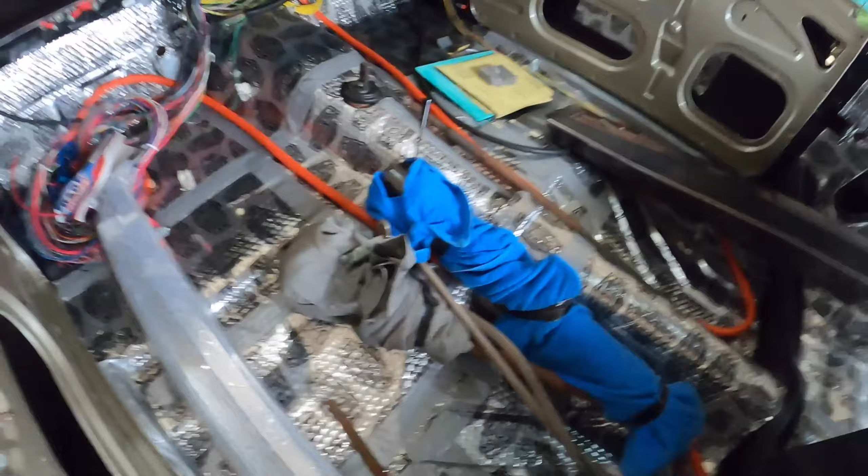So to make it a bit easier, what I want to do is fit the steering. So I've got it all wrapped up there. There's the steering column and the stuff. But before I do that, there's a bit of suspension work that I've got to do.

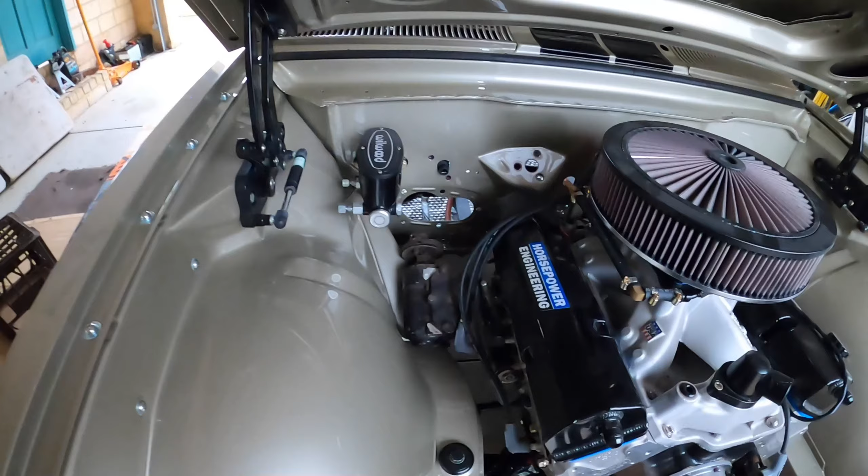That's not my steering box, so I've got to pull that steering box out and put my steering box in it. And then the sway bar and things like that, they're not done tightly, and the new bushes haven't been put into a lot of the suspension pieces.

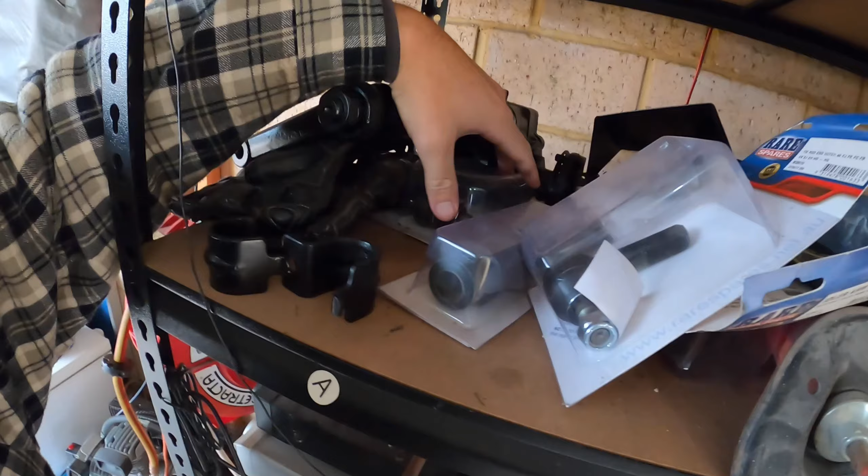So up here, probably should have got this ready beforehand, but I've got the new tie rods and ball joints and things like that I need to put on. There's my steering box, so I've got to put the steering box in.

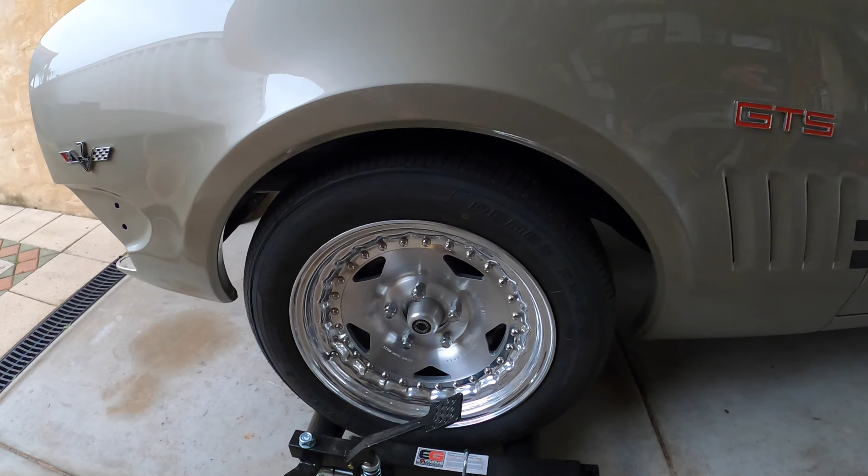Another issue that I've got, that one of the dudes on Facebook told me, is when I put the upper ball joints in, you sandwich them, or bolt them onto the upper control arms, and when I've put them on the upper control arm, I think it should be bolted from the top down, and I've bolted it from inside up. So I've done it back to front basically. So that's my first job, is to pull these wheels off, sort out that upper ball joint on both sides, so that's sitting correctly. I did say it was an amateur build, so learning as I go.

And get that fixed, get the steering done. I've got some painting to do in relation to the tie rods and steering arms, some of the steering arms, so I might have to blast them and paint them up before I can fit them and get the steering done.

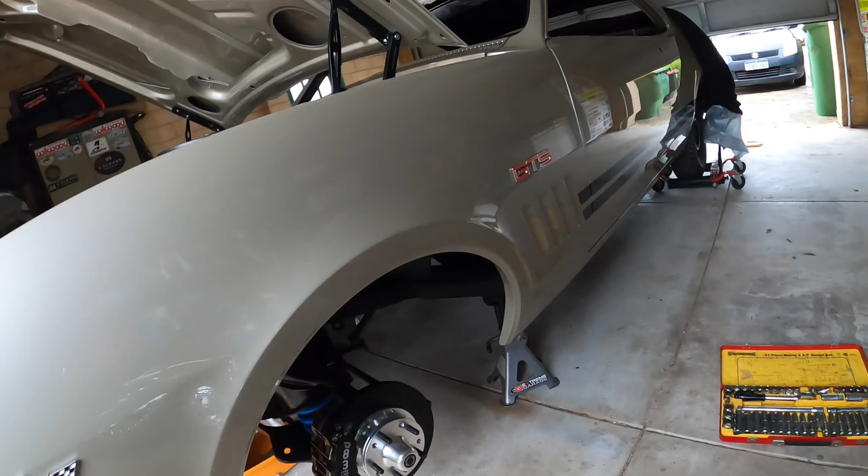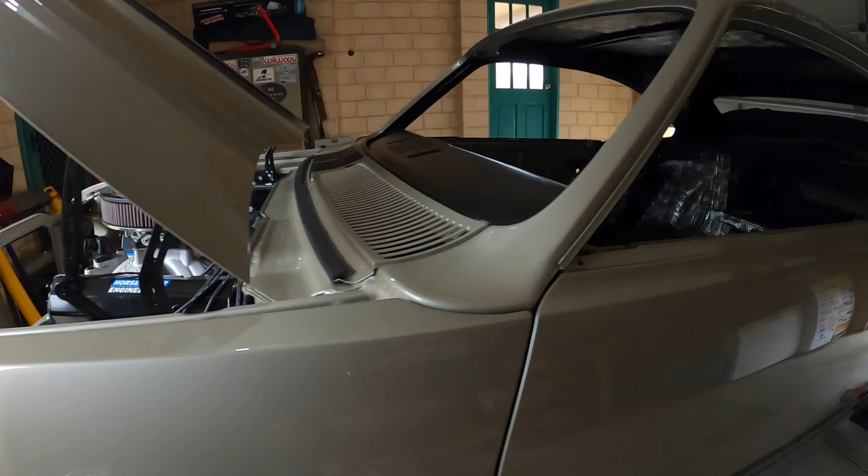So this is what I was talking about. What I've done here, I've got to take this ball joint out again, hopefully you can see it. I'll just get my phone so you've got a torch, bear with me.

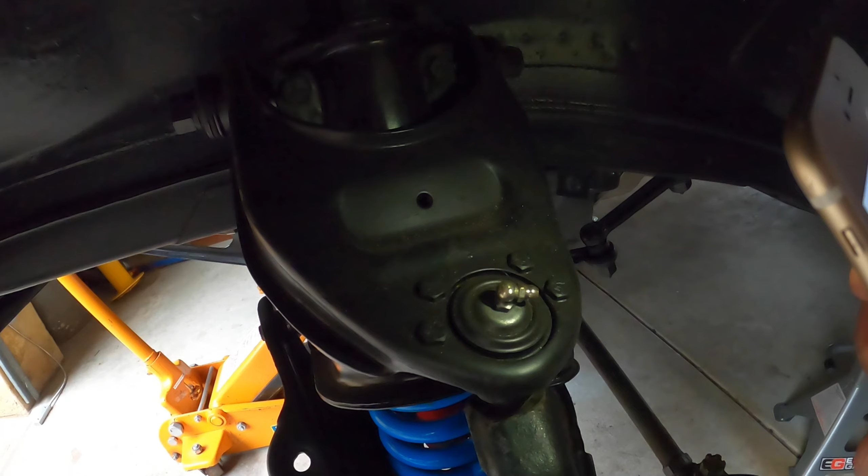So anyway, see these bolts here, just 1, 2, 3, 4. I'm going to undo them and then take the ball joint out underneath here and then sit it on top, because I've done that wrong. Here goes the torch. So that's the first job, sort that out, that way.

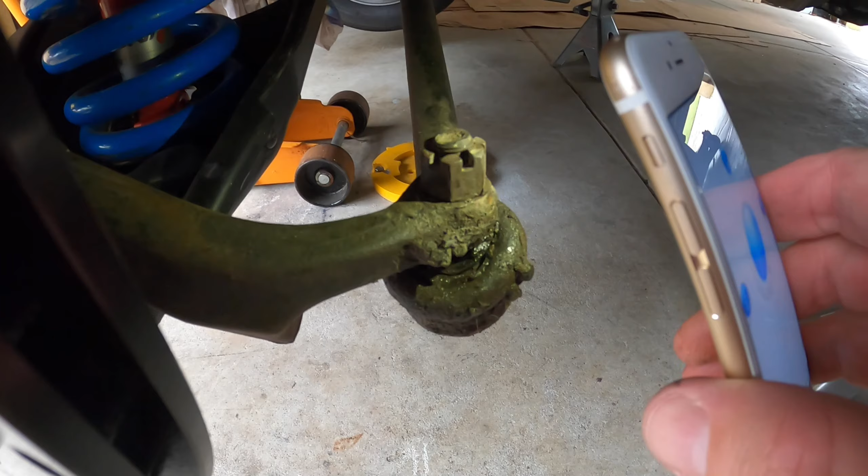And then see these steering arms and everything, again they're not painted, they're the old ball joints. That part's painted, so I've got to pull them off, blast them or sand them, whatever I'm going to do, and then put them back on.

Once I've done that, then I can take the steering box and nip everything up, get it right, and I want to put the steering wheel in if I can. That'd be cool, I feel like I'm doing something then once the steering's all working. So that's what we're going to do. Thanks, dudes.

So pretty easy, just drop that, whatever that thing is, that steering arm. That'll just come off. I might have to give that another little spray of touch up, and along here too, that looks a bit shit, doesn't it? I'll fix that up. So it's just undo those 4 bolts, drop that down and then put it through the top. So I'll go ahead and do that, and then I'll do the other side.

I might pull these off as well while I'm at it because they obviously need painting down here. So I'll pull them off, pull that off, paint that, put the new ball joints in, put it all back together, kick a couple of goals. That's not going to take too long. Happy days.

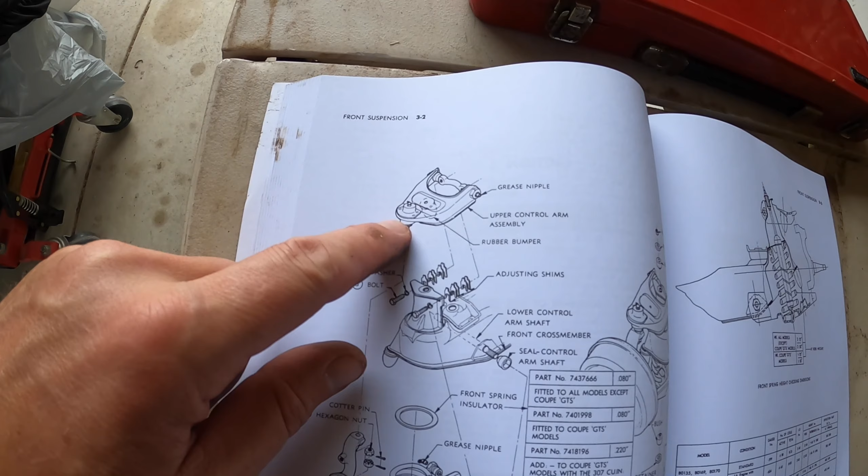Yeah, so I got the book out here and it does clearly show that top ball joint coming in from the top. So thanks for that tip, whoever told me that. That would have been another mistake I've made.

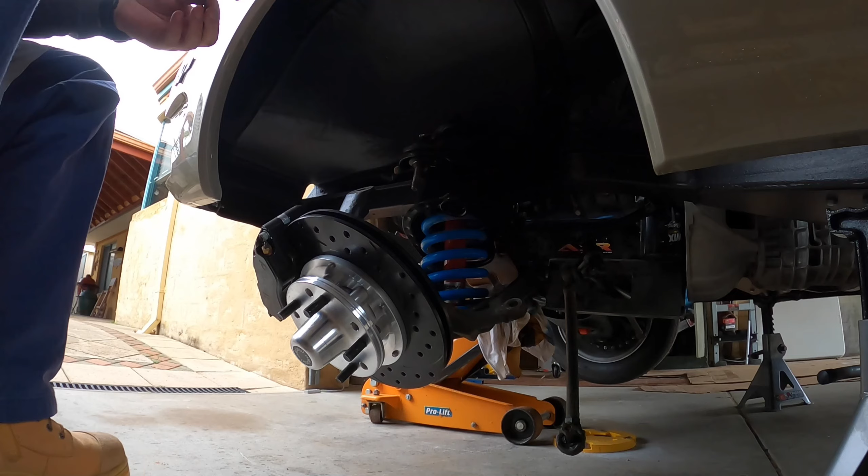That was in there like that, and now that's like that. These are the sort of comments I need and the help I need. If you see me doing something wrong, for Christ's sake, make a comment, speak up. And that way I can make sure it's all done right.

Righto guys, so finished rectifying the ball joints on both sides. Thanks to that guy, whoever it was that made mention of it on Facebook when he saw it. I'm going to put the post up, so I appreciate that.

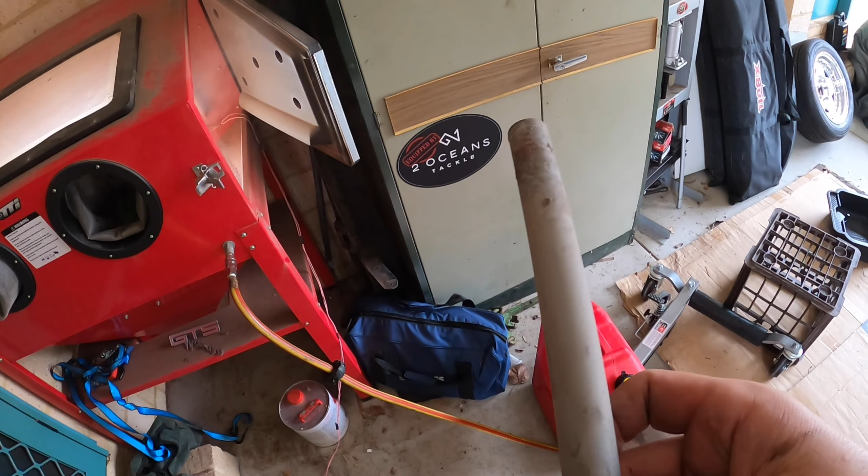Moved on now to the steering arms. So I've got a sandblaster, I'm just giving them a bit of a touch up with the sandblaster so that I can paint them. Once they're painted, they can go back on with the new ball joints and whatever.

Part of the problem I've got with this sandblaster is I've got this compressor from Total Tools I think it was. It's not a bad compressor, but I haven't really got it set up properly, I don't know a lot about them. It's a 3-cylinder thing, I think it's got plenty of air pressure to run the sandblaster, or just enough, put it that way. But you've got to drain it regularly, get water out of it and all that sort of stuff. Otherwise the water tends to come through the hose and then into the block and the sandblast nozzle, so that's just something I have to put up with.

I just do it bit by bit, slowly by slowly. Otherwise it generates too much heat, and when it generates too much heat, it generates too much water as well. So that's what I'm up to at the moment, and I'll keep boxing on with this sandblasting tool. They're pretty nifty actually, very handy to have.

Alright, I'll come back to you when I've painted them, I suppose. Cheers. Righto, so I've sandblasted the left side.

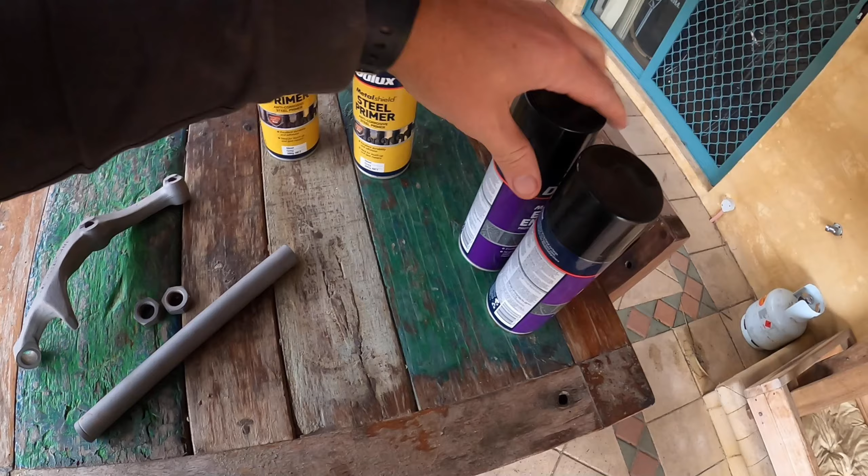Steering arms, I'll give these a wipe down with thinners. And then for these I'm just going to use a pressure pack, doesn't need to be anything fancy. I do have a spray gun, but there's no need to do that. I'm only doing one side at a time because that gun does get a bit hot, the compressor gets a bit hot, which creates moisture in the sandblasting medium. So I'll paint these up and hang them, and I'll show you when I've done that.

Righto, got a primer coat on. Come back, wait for that to dry, and I'll whack a couple of coats of satin black on it, and in the meantime I'll go and sandblast the right hand side.

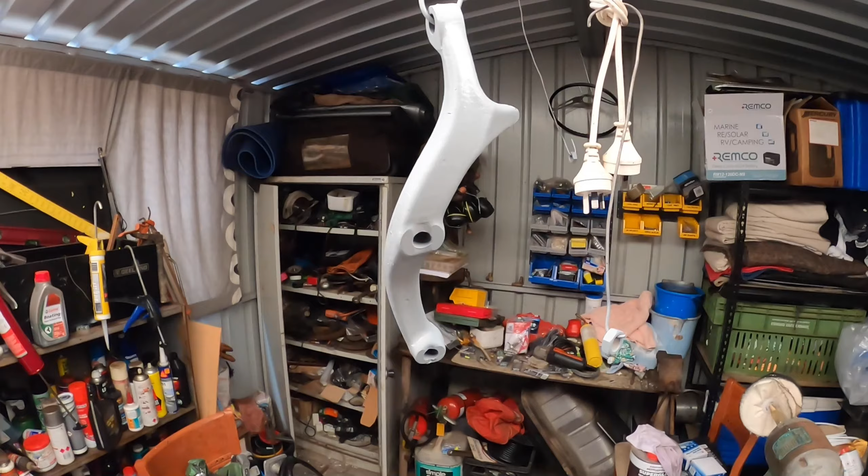Final top coat done, some of those little bits and pieces. This is the other side now, this would be the driver's side. And I'll paint them up.

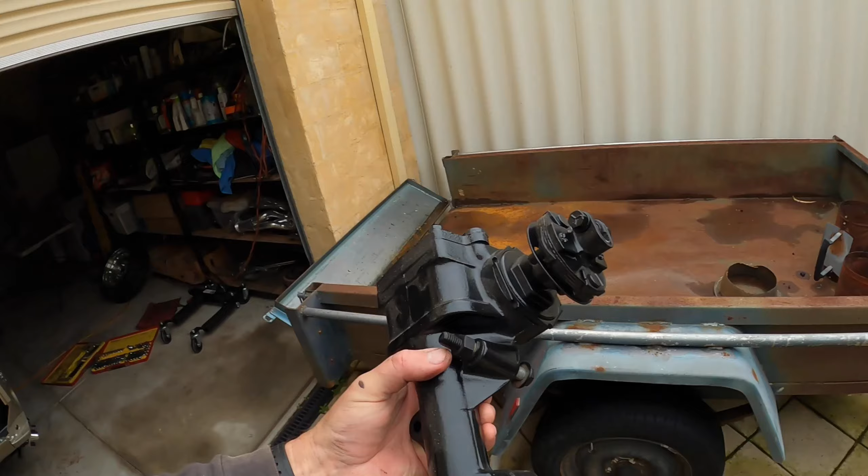What I'm going to do now is pull the steering box out, I think, and put my painted one in. Tidy up the bolts, sorry, that hold that in as well. So this is my steering box, painted.

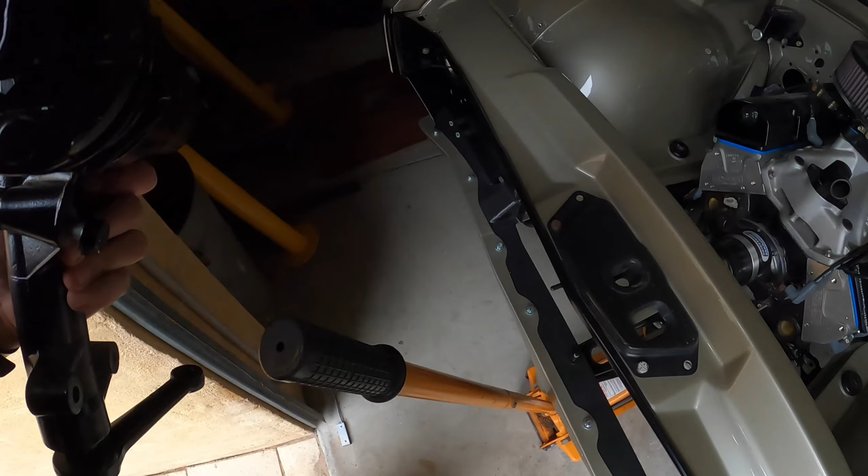It didn't have a lot of slack in it, so I'm not going to put a kink through it, just in the process of taking the old one out. Let's put this down for a second. I'll set the camera up because I've just undone the 3 bolts to get this out.

Right, well, that's the steering box in. Kicking a few goals now.

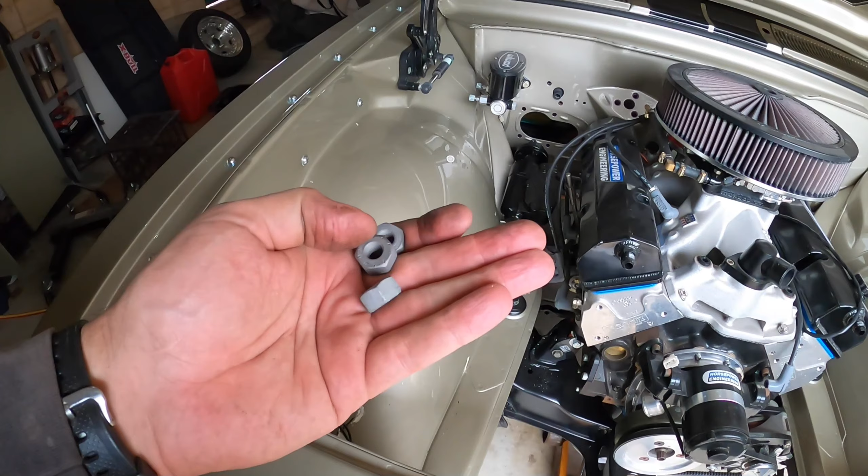I've got the nuts here, I'm just going to paint them up, and I'm missing the lock nut, the lock washers in the book. Tell you what, if you're doing up a car, one of these cars, and you don't have one of these, get them. You've got everything you should need.

It comes in 2 volumes. You need to get it realistically. You can't do it properly without.

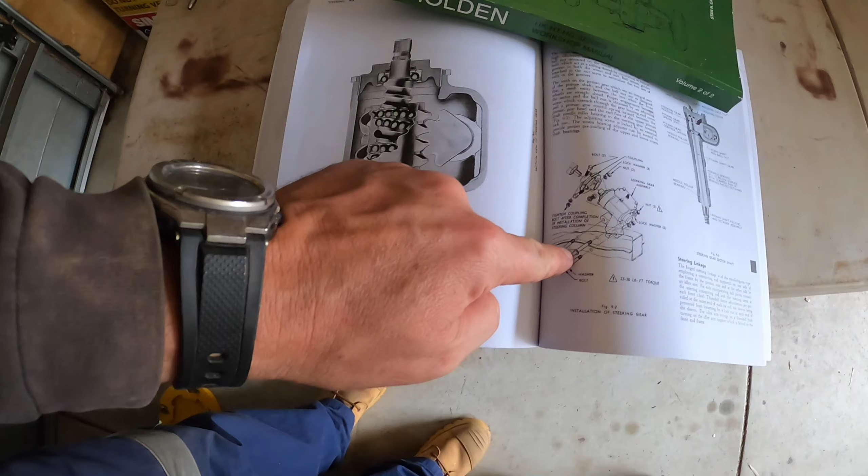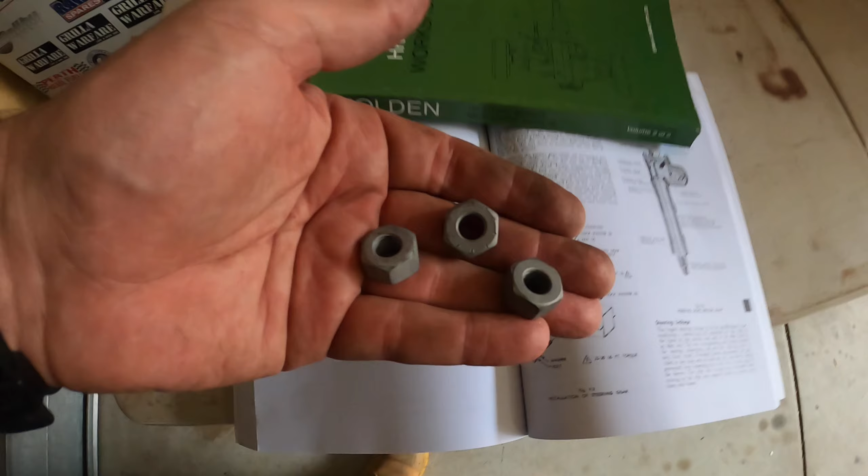So it shows a washer and a lock washer as well as the nut, and you can tell there was a lock washer on them, and my lock washers are missing. So I'll pick the kids up from school, grab them and be able to bolt it, I'd do them up. So I'm pretty well today, a bit more done than I thought I would. Happy days.

Remember the boot garnish, the stainless trim that I polished and repaired and filed and all that? Well, I thought, I've got the tin of paint out now, I might as well give that a coat of paint.

So I've taped it up, that's the undercoat, obviously just the centre stripe needs to be black. So just give that some undercoat, and I'll give that a lick of paint, and then I can put that on the boot, and that's another job done.

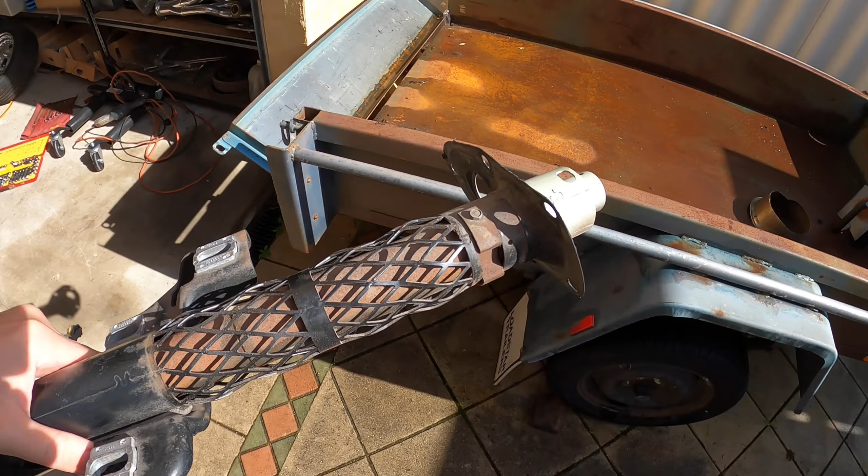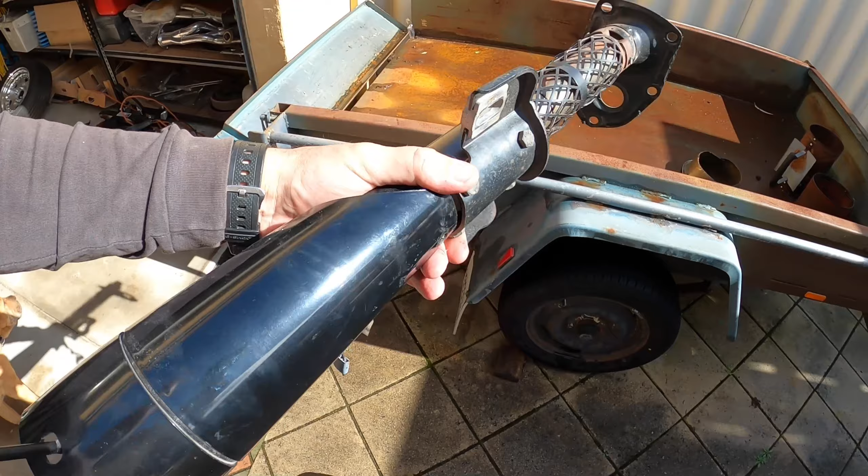So getting there, I'll get around. I'm going to try and put the steering column in today. So just sort of tidy this up, and it's probably not going to go in today because I've got to repaint this, put some sealant on there. We'll get that old sealant off, probably blast that a bit and paint it up. So probably not going to get it in today, but at least we'll get it painted.

Don't know really what I can do today because the other parts are still drying. It's been real wet over here, and cold, so stuff isn't dried properly yet.

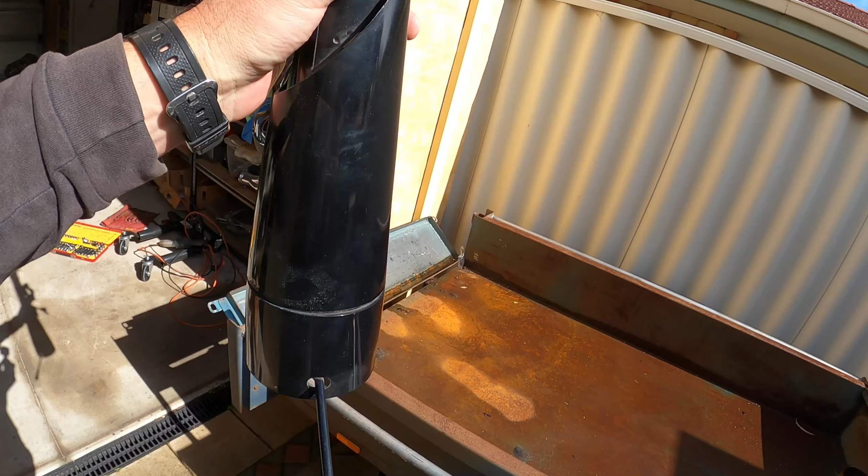So look, I'll just prepare this and get it ready, this steering thing, and I'll find the nuts and bolts and whatever in my containers of nuts and bolts and get it all ready, and then I can bolt it in. I've had a look in the manual how it all goes back together, it doesn't look too difficult. So yeah, get that done.

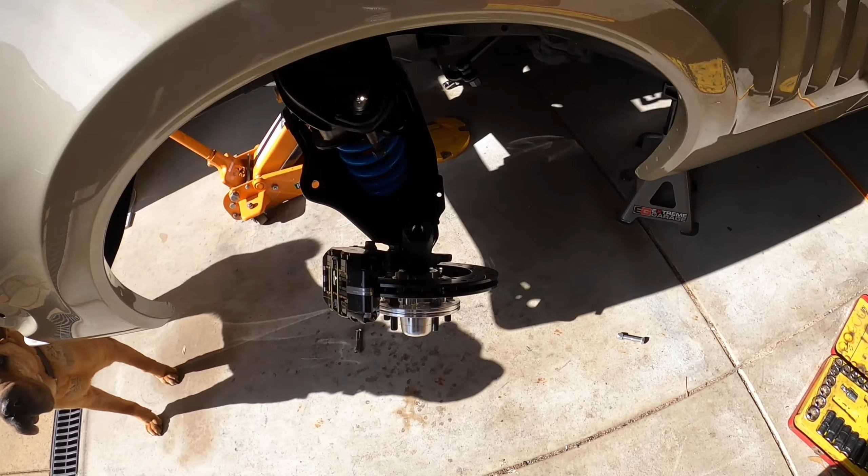While I'm at it, let's put this down. I've got to replace these because we've misplaced my nuts and bolts that hold the steering arm on, and these aren't high tensile. They were never supposed to be there, so I've got to replace them with some high tensile ones. Been told UNC, I think they said. I've got it written down anyway.

So dog wants to come in. I probably won't bolt it back together until I get a hold of those proper tensile bolts and get it done properly. So just a couple of things I can box on with in the meantime. Cheers.

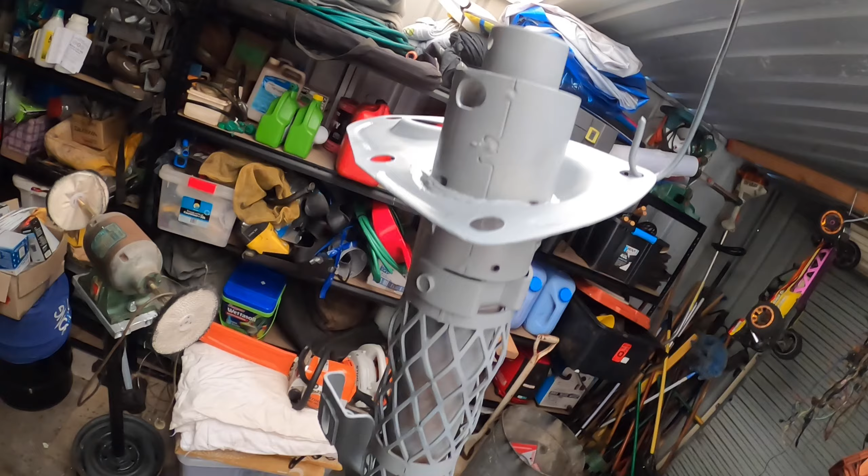So back in the paint booth, just giving this steering column a quick primer and paint before I reinstall it.

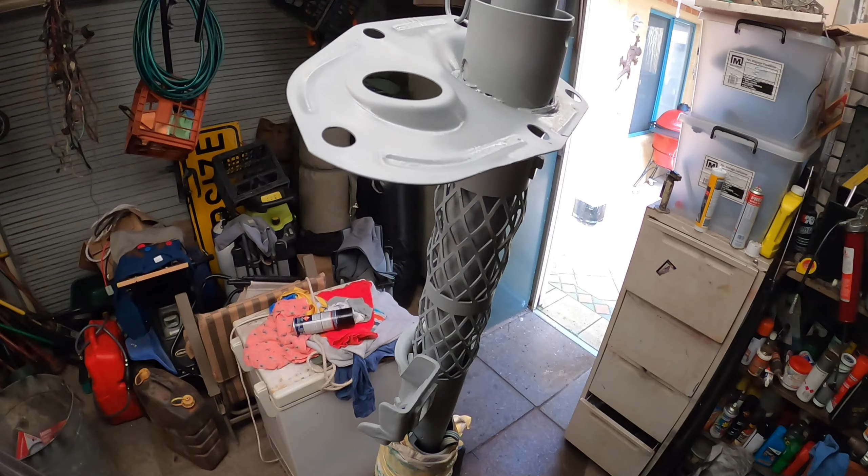You know, it doesn't have to be perfect, but it doesn't hurt to tidy it up a bit. It's 50 years old, so might as well paint it all before you put it all back together.

I gave it a quick blast. Actually, there's a bit of surface rust around here, and just light, you know, around here. So I decided to just give it a quick blast and a rough spray just to tidy it out. There's a plastic cover that goes over that anyway, but it doesn't hurt to do it properly.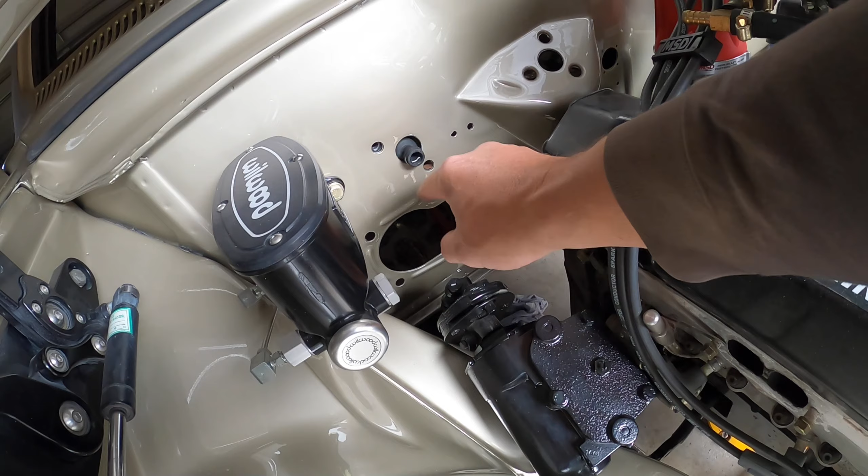So what I'm going to do now is go and find the nuts and bolts for everything, for the steering column. I'll turn that music down, otherwise I'll get a copyright infringement. So yeah, I've just got to find the nuts and bolts that go around there to secure these in. It's part of the clutch master for the hydraulic clutch.

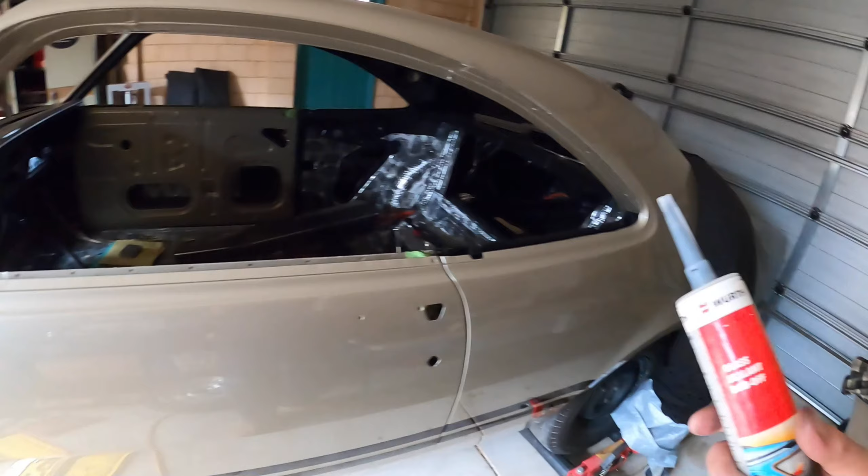I've got some sealant here that my mate gave me. Tomo painted the car, so I'll use this sealant to secure the steering column up against the firewall there. And now we're going to go through these boxes and find all the bolts.

So they've all been replated. I'll get into that now, so once it's all dry and painted, I can get back into it and put it together.

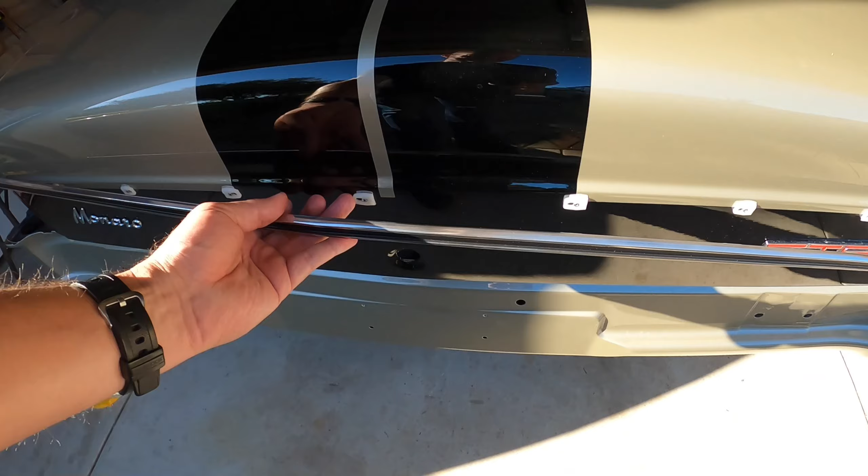Happy days. G'day everyone. I've just finished polishing that stainless steel trim for the boot garnish. That's the one I had panel beaten. Really happy with the way that's turned out, see that's really good. So now I'm going to work out if I can put that on there. Bear with me and we'll give it a crack.

I'll have to find the clips that screw into that. Righto, so I've just found the clips. They just slide in there on either end, and that goes in there like so.

Alright, I just want to do this with two hands so I don't scratch anything, so bear with me. Alright, I think this is going to be a bit quicker than just clipping it straight on. Sorry, take a bit longer. You can see that bolt there is not straight up and down, so those holes need to be elongated a little bit, maybe. That's the same.

So what I'm going to do is put that on the back burner for now. Yeah, I was just excited to see it once I polished it and pulled the paint off it. So I don't want to go rushing it and balls it up. So I'll take that off for now and put that on the list for another day. Cheers.

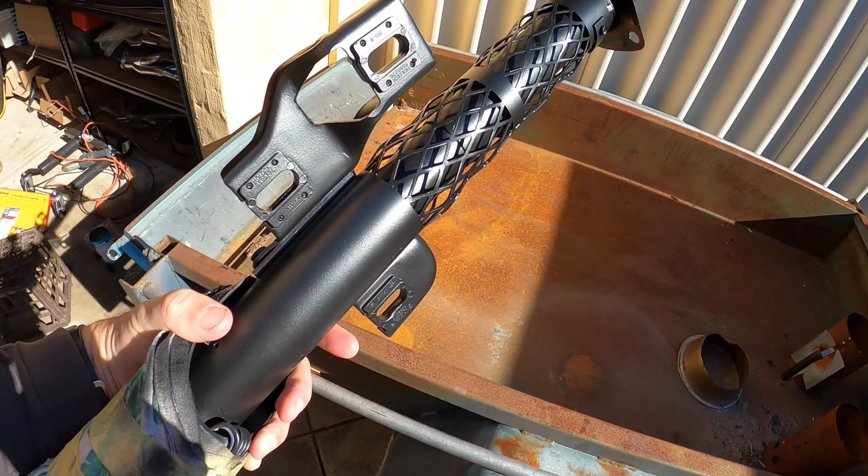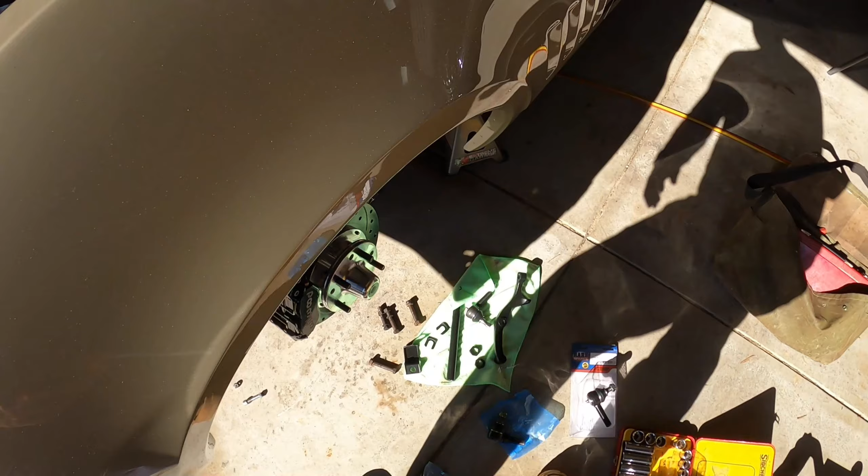Righto guys, back at it again, day 3. We've got a few things done today. So this is the steering column that I blasted and painted. It's kind of like Mickey Mouse. Just got to take this stuff off. Before I do that though, I'm going to finish this job, so putting the ball joints and steering arm on and all that. I put a post on Facebook because I lost these original nuts and bolts, so I put a post asking what to replace them with.

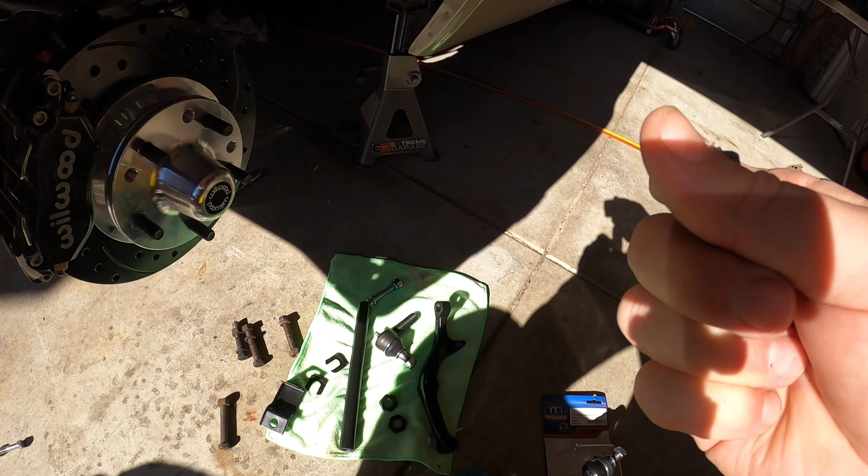I was always taught there's no stupid question, so I thought I'll ask the question just in relation to whether it be high tensile or not. I thought it would be, but I also am aware that high tensile is a bit brittle, so I just didn't know how that went with putting more brittle parts on steering arms. So anyway, that's the reason I asked the question.

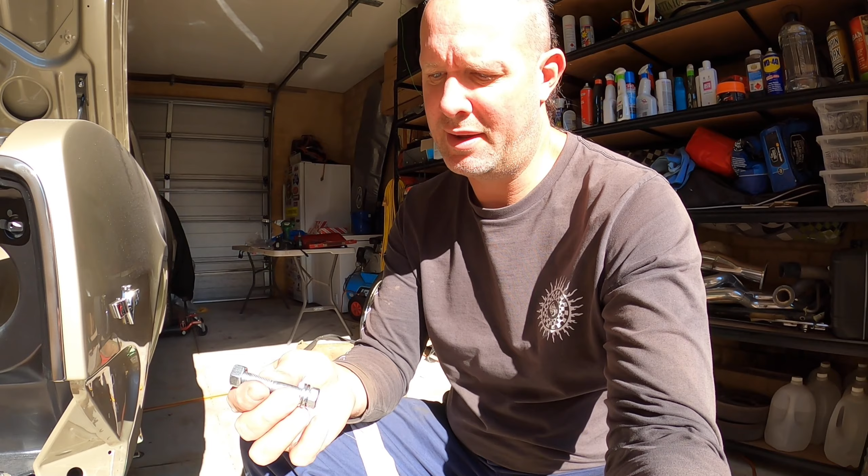But I think the overall general consensus was use the factory ones if you can. One of the posts I got on Facebook, which made a bit of sense to me - whoever that was, if you're listening, thank you for speaking to me about it - was that these are actually grade 5, and what he said was there's a difference in their brittleness, how brittle the part is, and he suggested just go with the original ones. So what I'm going to do is just clean these up with the wire brush, and I'll use the original ones now that I've found them.

I'm not going to go with the new ones. As was pointed out to me, Holden spent a lot of time researching and developing their products, and they would have chosen these particular bolts for a particular reason. So I am going to use the original ones. Thank you for the advice, appreciate it. Like I say, it's an amateur build, I don't know everything, but the way I look at it, I know enough to ask the question. So if you want to knock someone for asking a question, that's up to you, whatever, but all good.

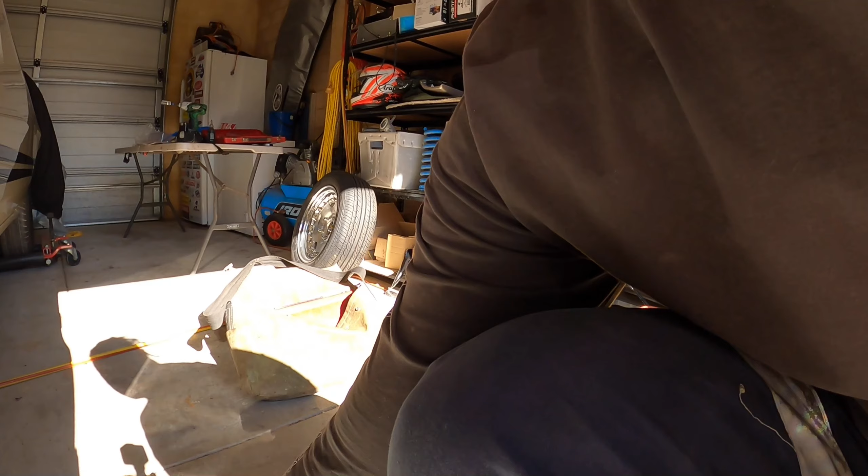So anyway, get back to what I was on about. Steering arm, it's all been blasted and painted.

So put these new tie rod ends in. I called them ball joints before, didn't I? Sorry. That holds the brake hose keeper. The arm itself has all been painted up, so it's all going to look pretty good.

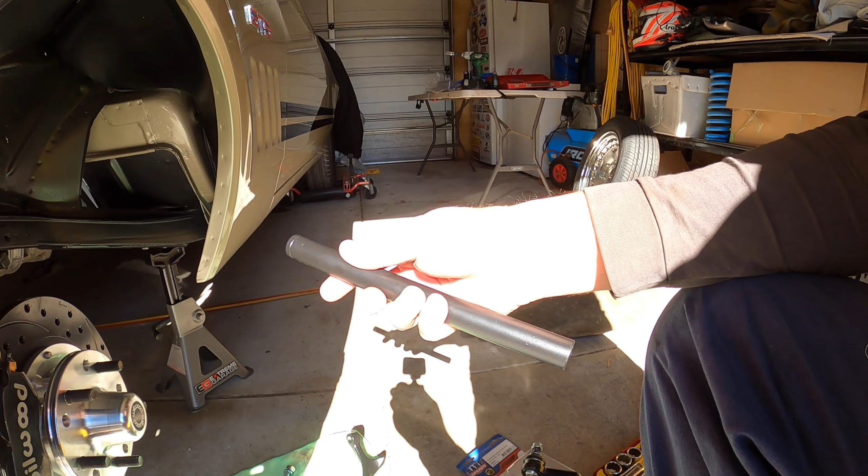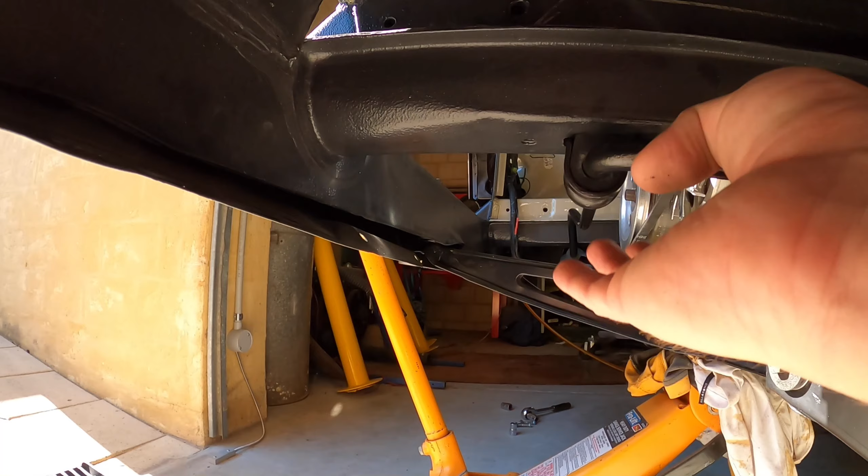Once I get it on the deck, once I finish putting all that in, I've got these, I've got to obviously do that up, but got bolts for them. So the sway bar, I think that's called. Anyway, once it's on the deck, I'll feel safer than it is now on the jacks to get in there.

And put the steering column in. That was the goal over these 3 days, was to have the steering wheel mounted.

I think after that, what I'm going to do is get under the dash, finish everything that needs to be under the dash, we're talking about the windscreen wiper kit that I've got, reversing that so it's not in the engine bay, and we're talking about the plumbing for the demister and all that sort of stuff. I've also got to mount a

reservoir for the hydraulic clutch conversion that I've done for the TKO 600 transmission it's going to run. The reservoir needs to be under there, all needs to be plumbed in. There's some wiring harnesses in there, but you don't know where to run that until you've got the majority of the factory stuff in there. So that'll probably be the next job.

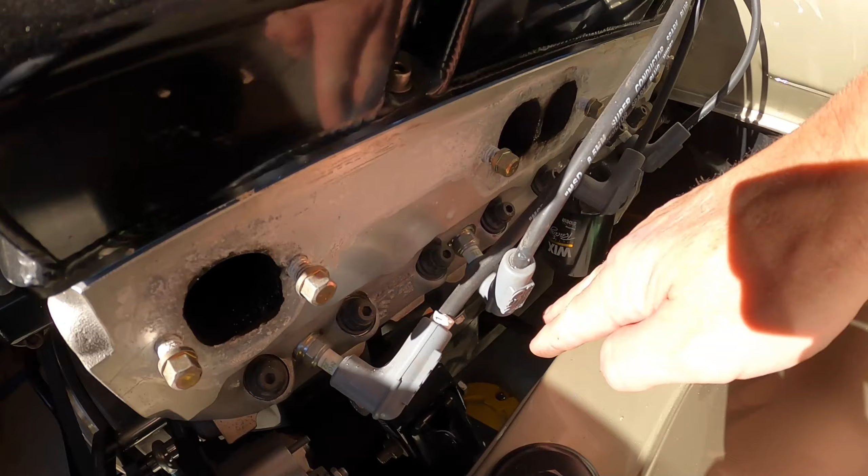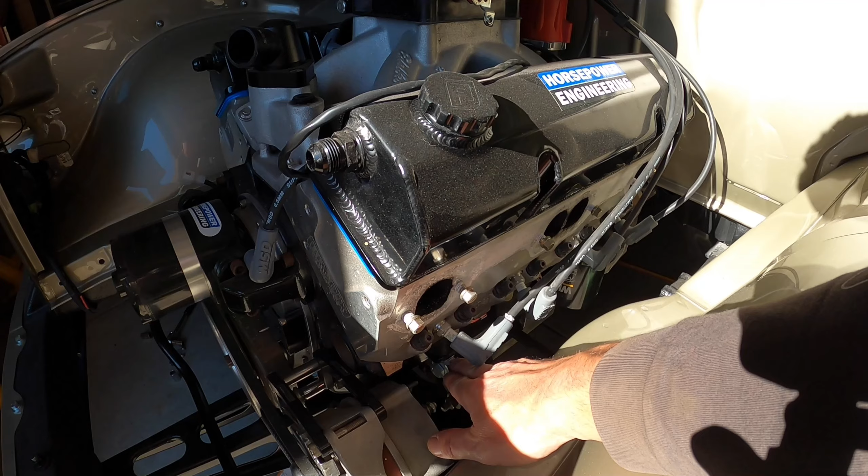Once I've done that, I've got some new engine mount bolts I've got to put in, because these ones are just sitting there. Obviously that's not going to do the job, so I've got to put the new engine mount bolts. I might replace these ones as well, I think. They're not high tensile, so I will replace these 3 on either side.

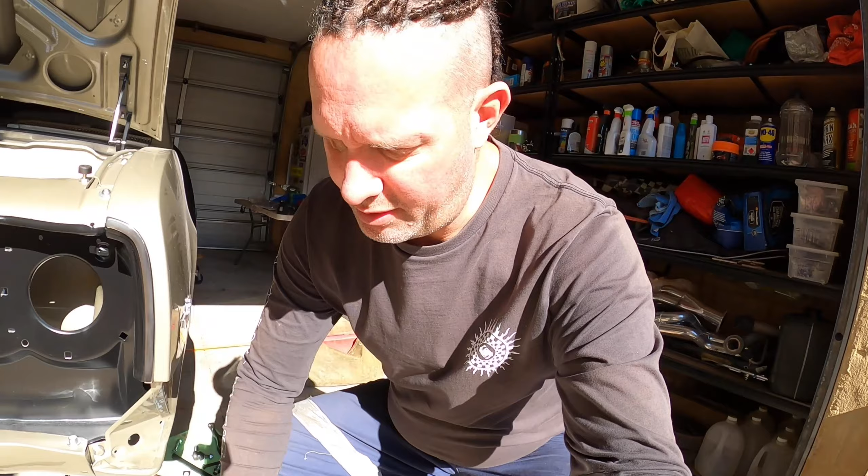Then I can maybe put the headers in and start putting the fuel system on, because this is just for when I had it on the engine stand. So look, plenty of jobs there, but it does feel like I'm making a bit of progress. I think in October I'll get a little bit of a work bonus coming my way.

So I'm going to order the diff. It's going to be a 9-inch shortened, 31 spline billet axles. I'll be running drum brakes on the back of that. I might even get new leaf springs, even though the ones on it are new, but probably take a leaf out, have it a little bit lower. I'll see how the front sits as well.

And then, once you've got the diff in, I'll get the tail shaft made. You're really kicking some goals there, so pretty keen to get that done.

And then it's just putting the interior in. I'm going to get a guy to do the hood lining. I've heard it's a bit of a bitch of a job. I've never done it before, and I don't want to stuff it up, so I'll get someone to do that.

I'll get someone to put the front and rear glass in after the hood lining's in, and then realistically, it's time consuming, but there's not a lot to do, so not a great deal anyway. So I'll get into it, get it on the deck, get these steering components in, and we'll go from there.

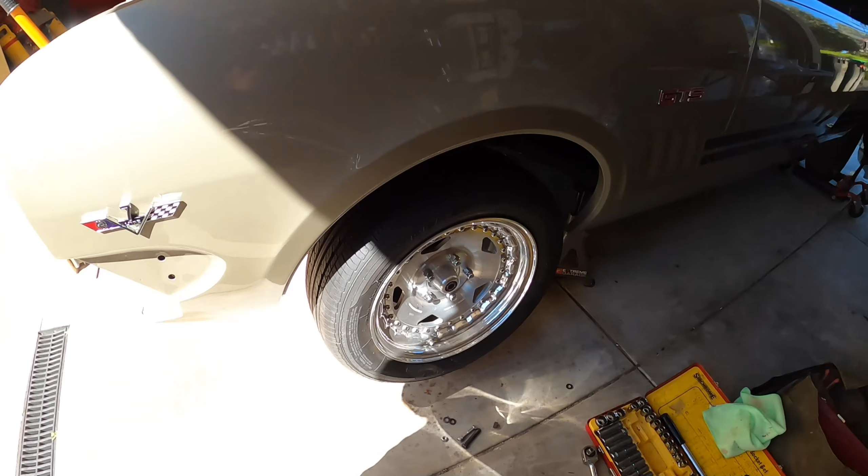Right everyone, wheels are on. Anyway, that's done. The nuts to hold the steering box are on.

Next job is the steering column. I'm pretty happy with that. I'll go and have a look in the book, take this off the trolley jack and the axle stands, and we'll carry on.

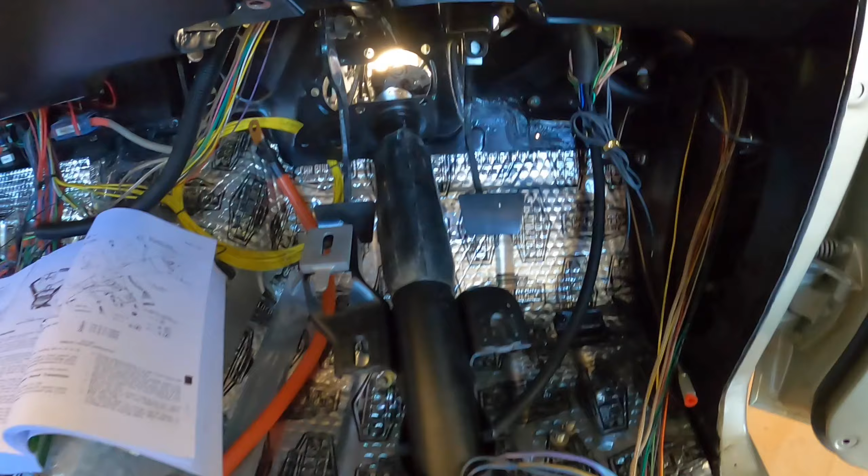Right guys, I've got to the stage where I'm going to put the steering box in. So I found all the little nuts and bolts - there's 5 of these little ones, a couple of these, and a little spacer. Obviously got the workshop manual to make sure I don't stuff it up, and we'll whack it in.

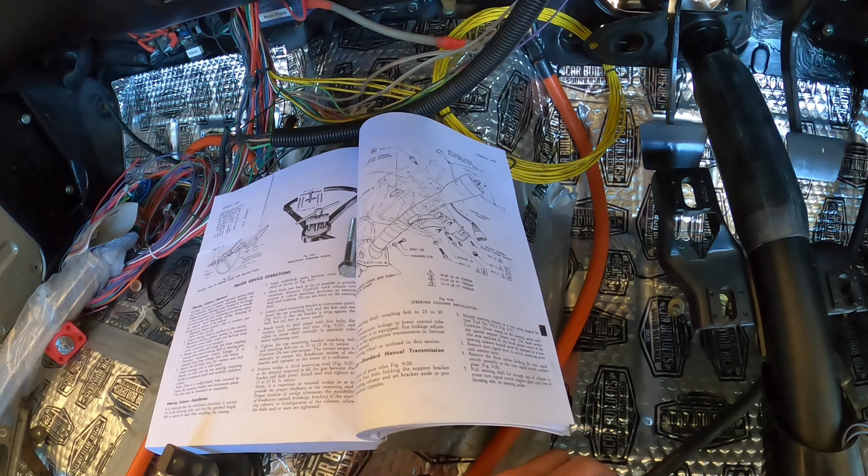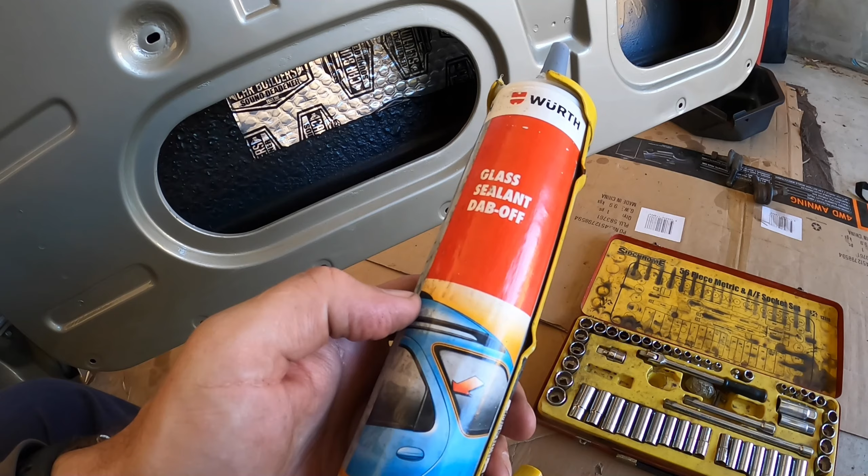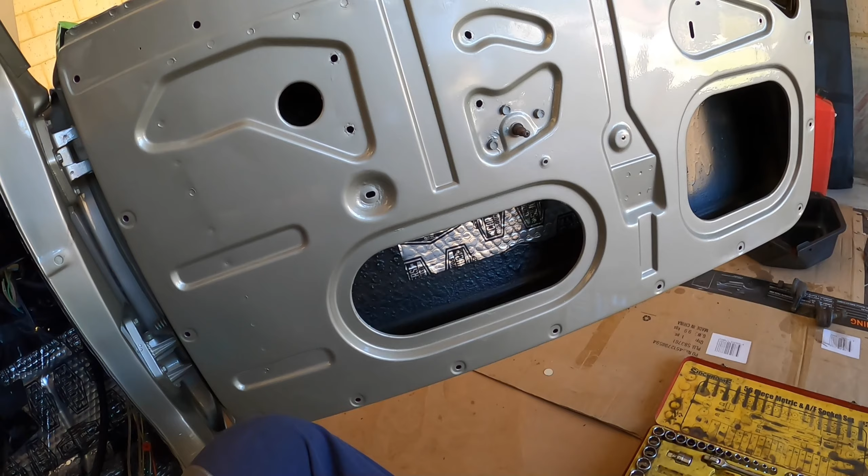See how we go. I'm going to be using this sealant - it's a Würth product, glass sealant. Been told that'll do a good job, so I'll seal it up with that on the back of this door, and we'll get to it. So I might as well do that now. Alright, that's the sealant on.

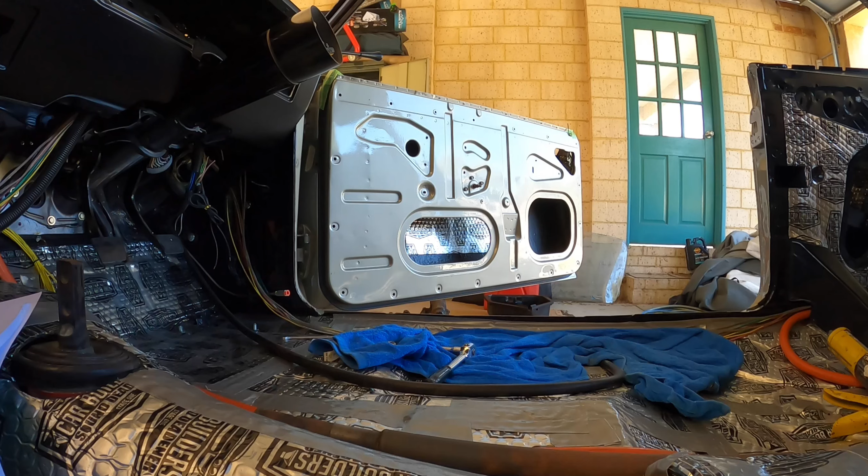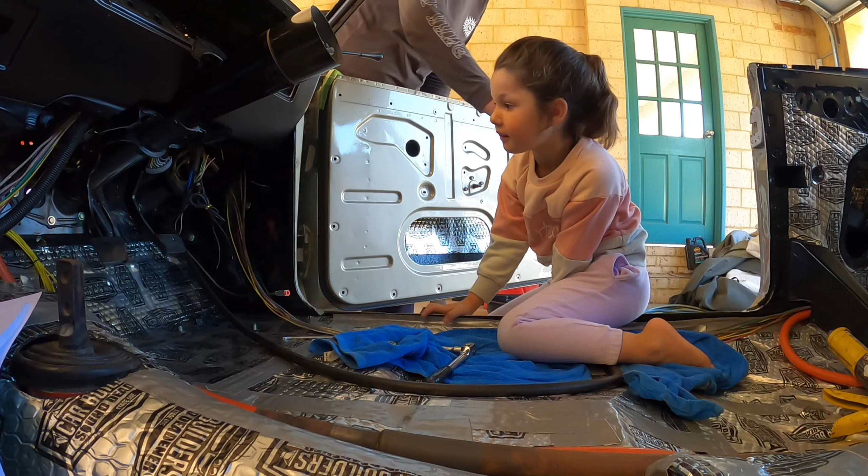Ellie, you want to hold something for me? Help me out here, babe. You'll have to climb in the Monaro for me - no, I need you to push on something while I do it up on this side. Help me out here, just jump in here. Can you push on this? Right up against it. Come on, I need some help. Push on it, just climb in here. That's it, and then just climb up under there and push on that, on your hands and knees. That's it. Yes, you can. Push on what? On this. Hold that. That's it, just don't move now. Just hold right there for me. Don't move, perfect job. Pushing it, yeah. Right, you can get out there if you want. Thanks. Good job, Pumpkin.

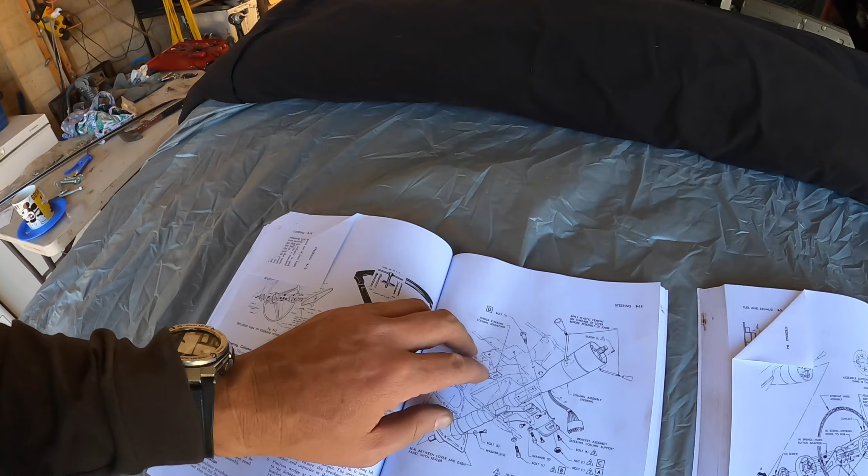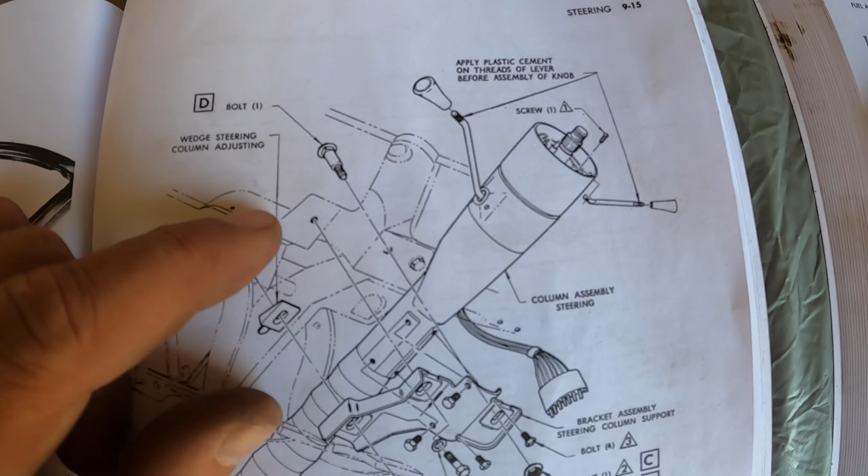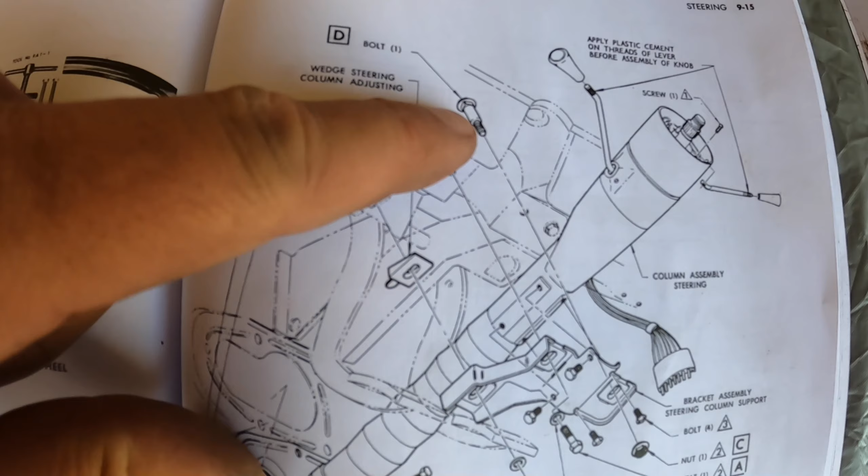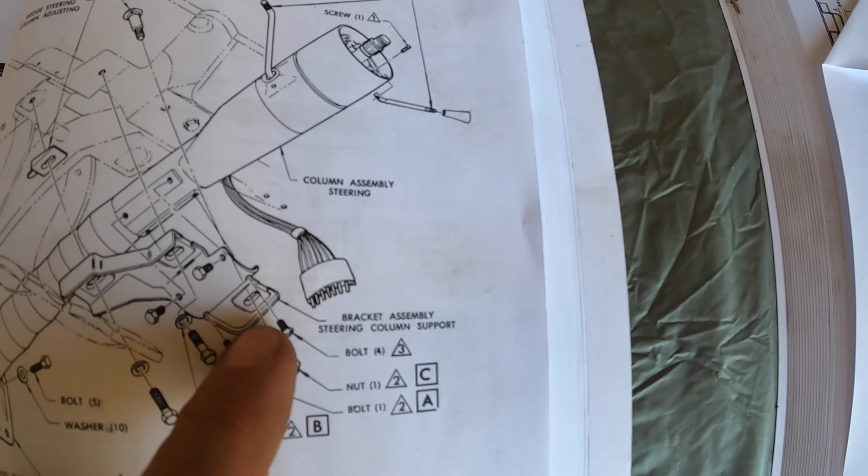Right, everybody, I'm looking for a bit of help here. I'm missing a pretty important part - I cannot for the life of me find that bolt. Now that's the wedge steering column - oh, that's, I've got the wedge, I've got a bolt for that. It's this bloody bolt here. It's got a square head under there, it fits into this, the underneath of that, the square head, and then tightens up with this nut. Now I can't bloody find it.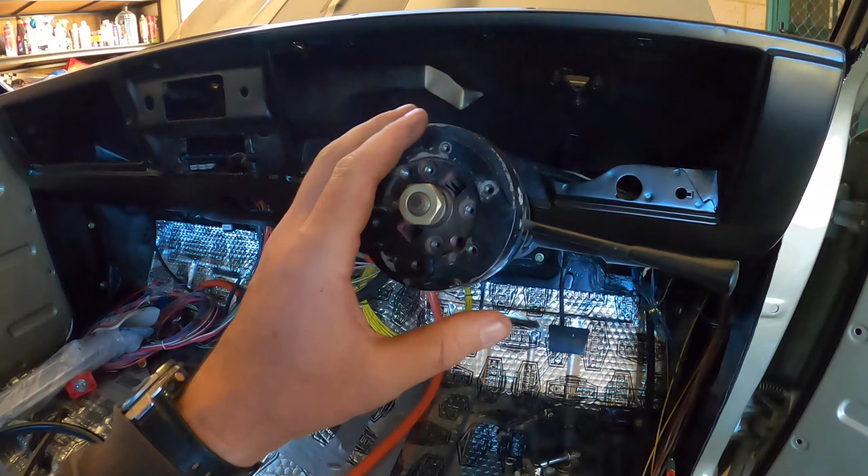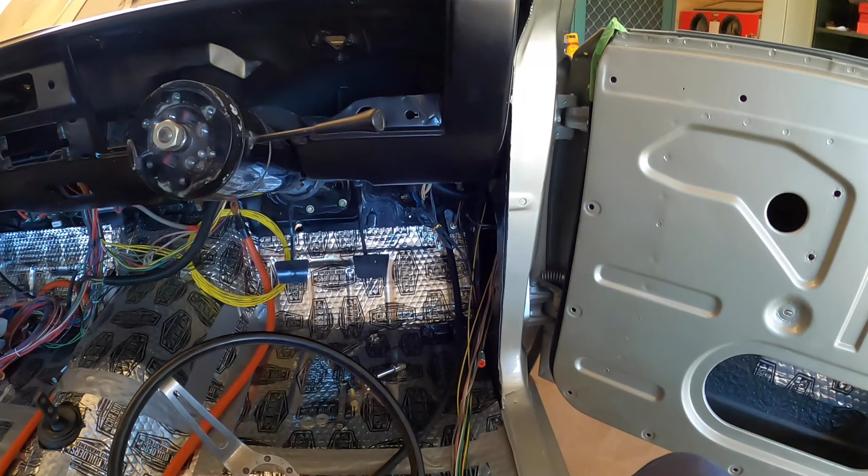Kicking a few little goals - got the steering shaft in and the column. So I'll work out how that goes. That obviously goes like that. So as soon as I screw them in, I'll just find the screws for that, we'll have steering. Even though that's not done up properly yet.

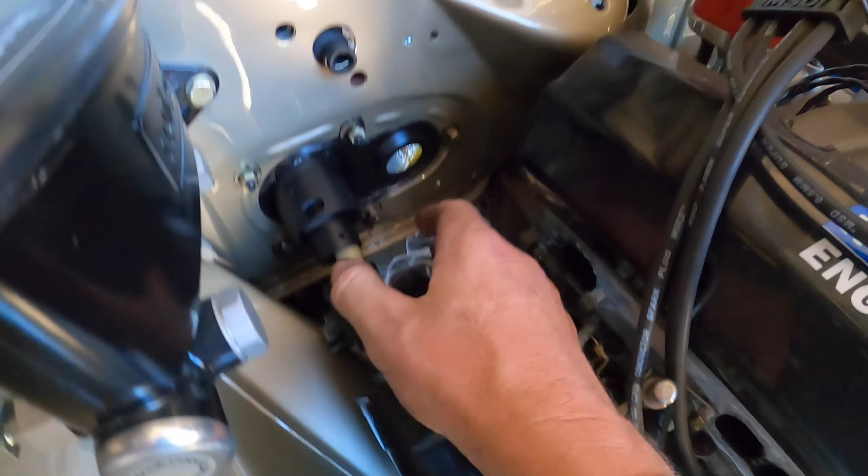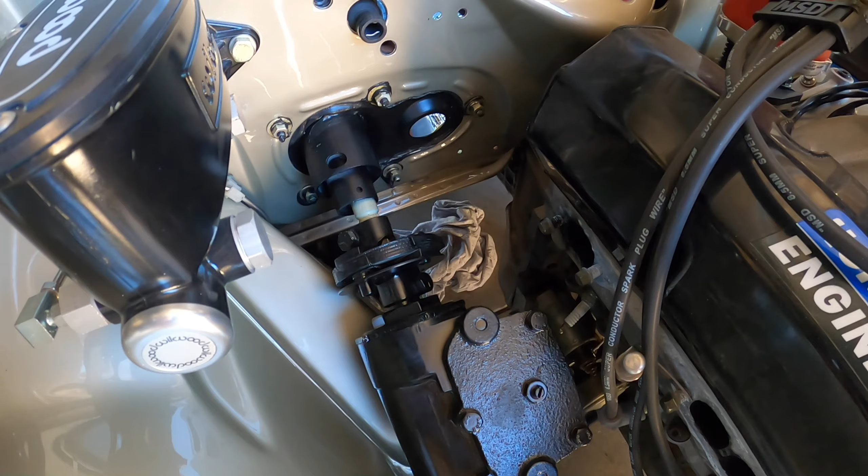It's all done up, it's all done up there. A little bit of primer paint there - I'll have to mask all that up and paint that black. But yeah, pretty stoked with that, pretty much what I wanted to achieve. This time I unwrapped the car, so out of the cover. So happy days, I'm going to call that the end of the episode. Maybe I'll put the steering wheel on, and then it'll be the end. I'll go and do that now, and then we can properly call it a job done. Alright.